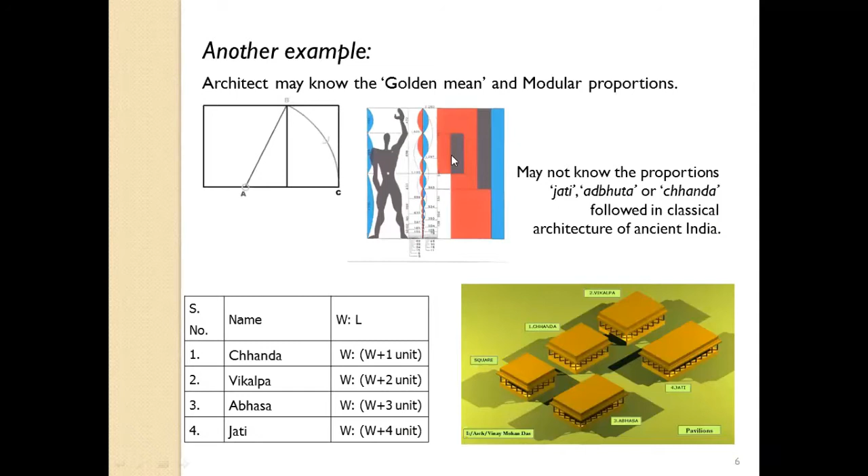Another example of proportions: Jati, Adbhuta, Sarvakarmika, these are the proportions of buildings which describe the width and height ratio, 6:9, 5:8, and so on. We are not aware of this. We are only aware of golden mean and modular proportions.

Another example, in case of town planning, we know the principles of town planning as neighborhood planning, garden cities, three magnet theory. But are we aware of the detailed plans described in our ancient Indian treatises like Dandaka, Sarvatobhadra, Nandyavarta, in which every detail related to water supply, sanitation, roadways, open spaces, built-up spaces, and even dimensions of roads are given? But the problem is that all this is not taught to us.

This is the irony, that we consider Vastu Shastra as ritualistic. The problem is those Vastu Shastris who talk about mystical things are actually pandits, not technical persons. So even if they go through the treatise, they will not be able to understand what Dandaka, Sarvatobhadra, Nandyavarta means. They only talk about the small portion which is given in the Vastu Shastra as mystic, but we don't know about the larger portion. So there is chaos.

So the objective of this is to make you aware that our ancient Indian treatises are not mystic. They are purely and purely scientific.

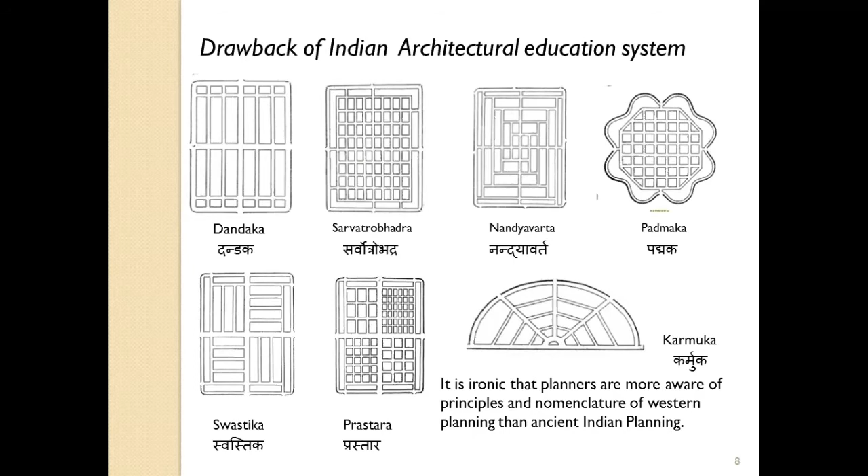Now let us come to the word Vastu, which is considered a mystery. Vastu is actually derived from a word Vasu. Vasu means matter, and Vastu is the act of modifying matter into a usable form. That's why it is called Vastu, and the treatise written on modifying matter is called Vastu Shastra.

Once we modify matter into a usable form, it can be cities, towns, house, temple, villages, furniture, vehicles, sculpture — any form we convert matter into something usable, that comes in the domain of Vastu Shastra. So it is actually the relationship between dweller and dwelling. In modern terminology, Vastu is equivalent to architecture and planning that we have studied in our 5-year degree course.

Let us take a hypothesis. If we think in context of medical sciences, let us consider Western medicine and architecture-planning, again a Western system of education. If we consider allopathy as architecture and planning, then we have to consider yoga and Ayurveda as Vastu, that is the Indian system of planning.

Now, before we go to Vastu Shastra and the details we are dealing with, let us look at the present system of designing buildings. Since you are all architects and students of architecture, you might have designed a single residence. While designing any building, we talk about aesthetics, proportions, circulation, space requirements, climate, sun movement, energy, management principles, services, construction technology, building materials, structure, joinery, and much more.

All these details are already described as we study in the present system. In ancient Indian treatises, hundreds and hundreds of verses are written on these. Even the joinery detail, the details of trusses, the details of roofs, building materials, how to make a brick, joinery including mortise joints, tenon joints, all those. Only the names are different, they are Indian names. Services, water supply, sanitation, each and every detail is there.

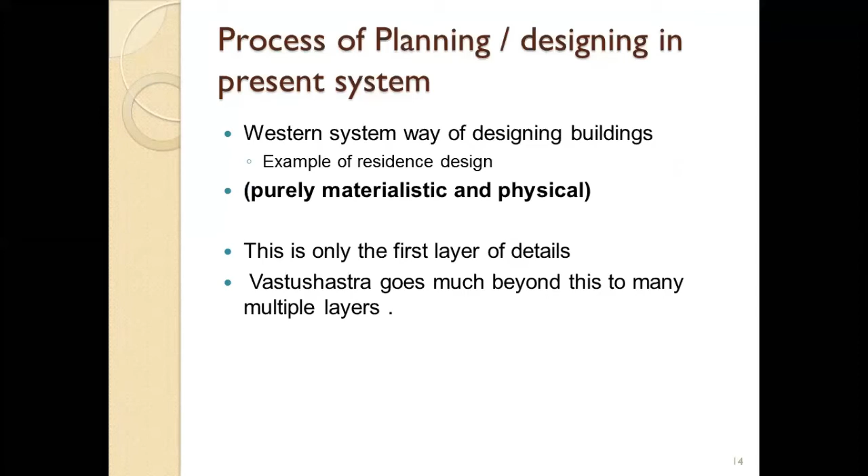Our building structures are designed based on the human body. So before we go further, let us quickly look at the human body. The human body basically consists of a physical body which has proportions, a mental body, that means your thoughts, and a spiritual body, based on your horoscope, the day on which you were born.

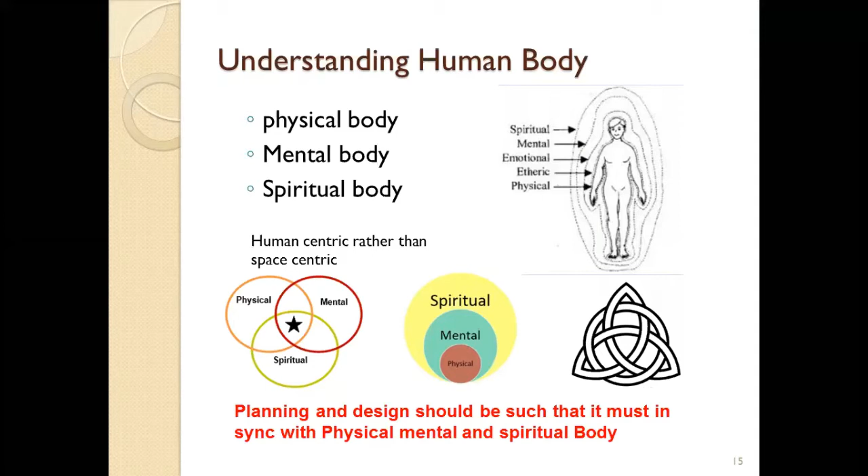So how are all these physical, mental, and spiritual bodies taken care of while designing buildings as per the ancient Indian system, apart from the first one which I have already addressed? I have conceptualized 6 layers that our ancient Indian treatises take care of while designing a building. The first is physical space planning, which I will not talk much about. You know how to design a building. All those details, all those subjects which you have studied in your 5-year B.Arch degree course, except RCC, exist in ancient Indian treatises in the same detail, maybe even more.

So I will now talk about the physical body, that is body proportions, the mental body, that is your thought process, and the spiritual body, that is based on your horoscope. Now this is somewhat ritualistic, you may believe it or not, but some persons do. Even if you remove this particular layer, although it is also very scientific, you still have to consider layer 5 and layer 6 — the geometry of your residence, the geometry of your body, and the geometry of the cosmos have to be in sync for greater resonance. The last layer considers time as a fourth dimension. The fourth dimension, after length, breadth, and height, is time.

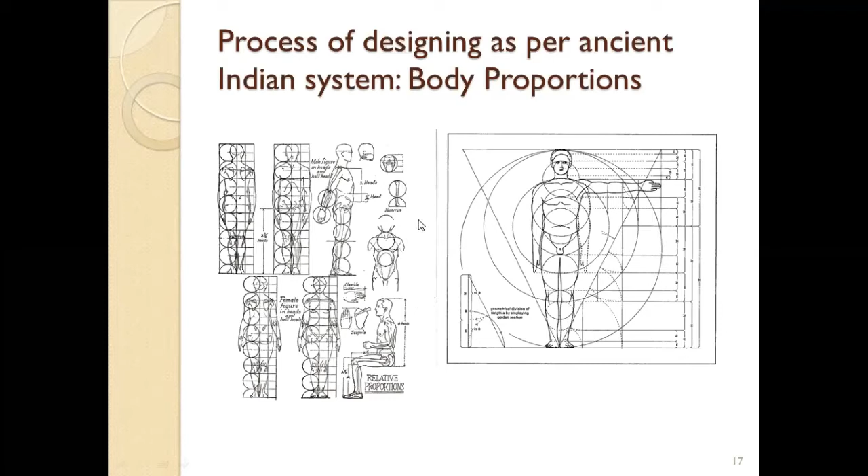Now coming to the second layer, physical body proportions. Medical sciences and other sciences have already established that our body has certain proportions, and these proportions are almost fixed. Not only our body, but our internal organs are also in certain proportions. So if we study these proportions, we will be able to find the proportions of the body — students of fine art are able to do this much better than us. These are just images I have taken from the internet, just to convince you how the proportion system works on our body.

Now, these proportions in the ancient Indian treatises are considered with reference to the dimension of the middle digit of the middle finger of the right hand, which I have shown on the right-hand side. That dimension is called the angula, and it is approximately equal to 3/4 inch. This is the basic dimension for designing any building, and it takes care of your body proportions in relation to the building proportions.

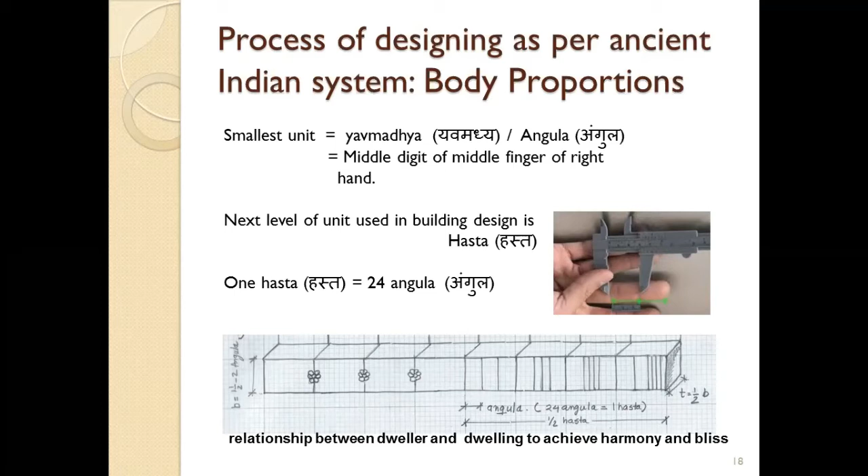Now, coming to the mental body system. Here I would like to give you certain examples — if you watch a concert on TV, and if you watch a concert live, what is the difference that you find?

Actor is same, voice is same, ambience, what you see there and what you see on the TV is same, but still we enjoy the live concert most. Think of it.

Another example. If you go to a market, will you purchase popcorn? I think no. But while watching a movie, you prefer to purchase popcorn. Why? You are ready to pay 100 rupees for a small pack of popcorn, even if you are not hungry.

So let us recall some concepts of our mental body. Our body has 5 senses - ear, skin, eye, tongue, nose. These are the sense organs. The main thing is, if all our 5 senses are pleased, I will be able to enjoy any event most, because they are happy.

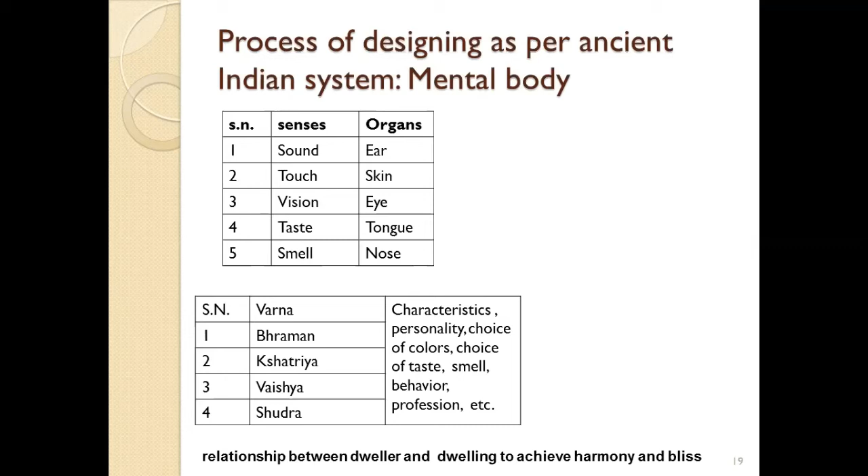I have to be fast. Now this is the third part of the ancient Indian system. You can call it little ritualistic also because I don't know whether you believe in Jyotish Vigyan or not, but I think it is established.

You know that each and every body affects each and every other body with m1 m2 upon r square. So at the time of your birth, the major planets which are near - the sun, the moon - affect most. Based on that, your horoscope is prepared. Even if you are not interested, you can ignore this particular layer of the system.

So ancient Indian architects considered the dwelling unit as a living organism. All these buildings - this is also proved in science now - matter is a living organism, it's not dead.

The ancient Indian architects performed various detailed mathematical calculations based on the nakshatra in which you were born. That means based on the location of sun and moon at the time of your birth, with respect to the various nakshatra, that means in which constellation they are, gives you the details about your personality and much more.

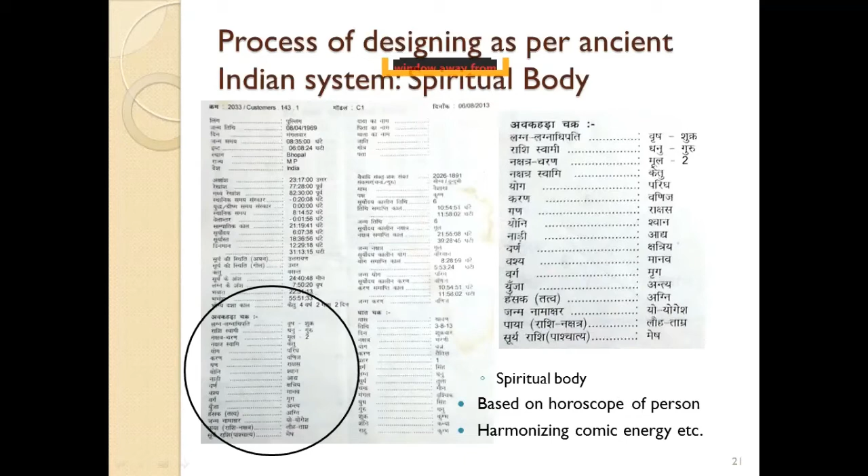So how these formulas are prepared, how mathematical they are, and how they are applied, I am just going to give you glimpses of it. This is just an example. If you take the printout of your horoscope at a particular point, you get some details like this on the right hand side. I am only interested in which particular constellation I was born, that means in which constellation the sun and moon were. Once we know that, I have to perform detailed mathematical calculations.

Do not look at the left side of it, that is Aaya, Var, Vyaya, Ansh, Dravya, Nakshatra. Just consider them A, B, C, D. Because sometimes if I talk about names, you consider them as ritualistic, so I just want to replace these names by A, B, C, D. So what is done is, I have written a word, pind. Pind is nothing but a mathematical composition of area and perimeter of your plot and your built up space.

So once you design the building, the area and perimeter, see how technical it is, are multiplied and divided in various aspects to calculate our variables A, B, C, D, E, F, G, H and so on. It requires detailed mathematical calculation. That means area multiplied by 9 divided by 8, and whatever remainder is left will be called as X. And any Pandit is not able to perform these calculations, so they don't do it.

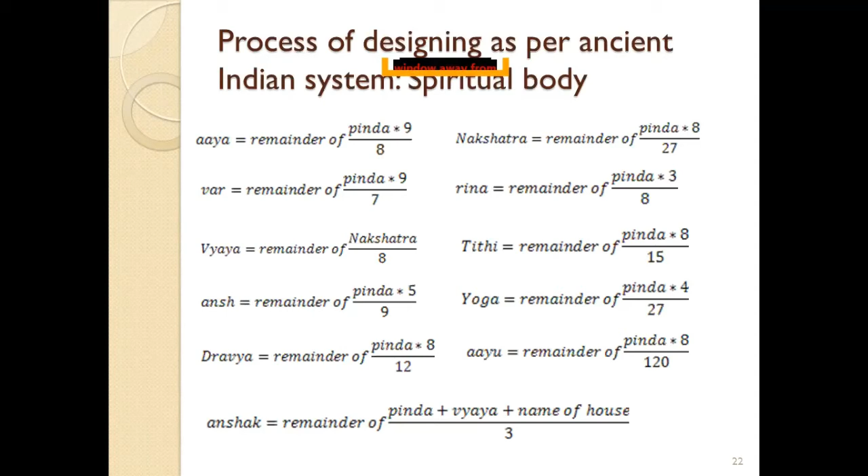They say that once all of them get matched with the constellation in which you were born, your house is in sync with your spiritual body also. So doing all these calculations and optimization is a complex process, purely mathematical and technical. So you can try it. I don't know because it is related with Jyotish, so I don't know whether you believe it or not. But I say at this particular stage, why don't we try it? There's nothing wrong in trying it.

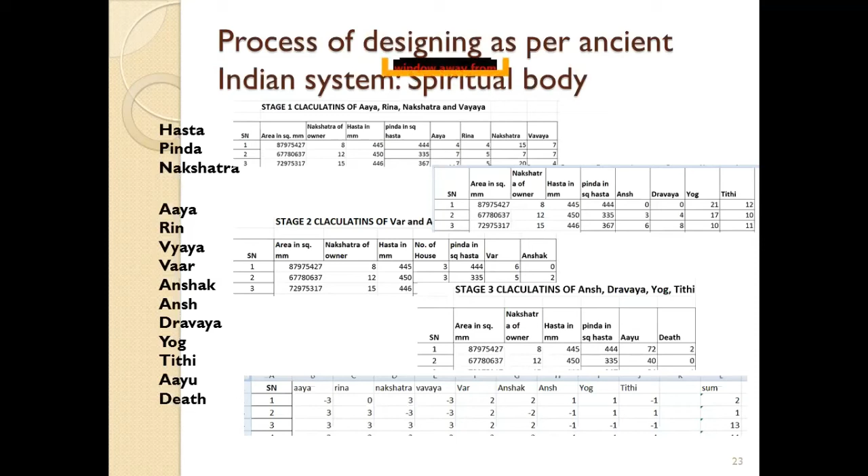So once all these are made, that means we have taken care of our physical body by proportions, we have taken care of mental body by our senses, and we have taken care of the spiritual body by considering the constellation of birth. Now let us go to the next layer, which is harmonizing mind, body, and soul with the cosmic geometry. Now what is cosmic geometry?

You might have heard of two things which are very popular in Hindi, Saur Mandal and Tara Mandal. Similarly, this is a sort of mandal. Our cosmos is very large and very complex. It is really difficult to represent the complete cosmos in the form of a picture, or to describe the cosmos in words.

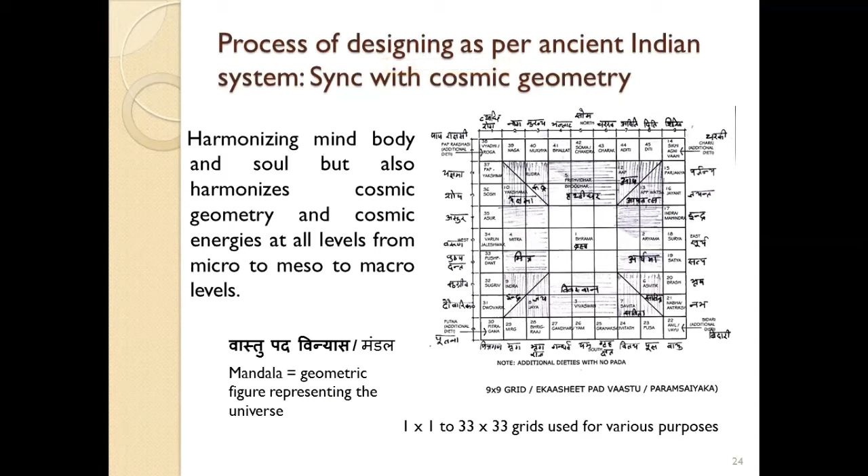So abstractions are required, whenever things are very complex we try to put it in abstract form. So this grid is an abstract of the complete cosmos, in which they have represented the complete cosmos in abstract form, and we call it a mandala. Now once we have converted the complete cosmos into an abstract form, we also say that as is the human body, so is the cosmic body. So what is done is, over this abstract form, a human body is overlapped, and then what we call Vastu Purush Mandal.

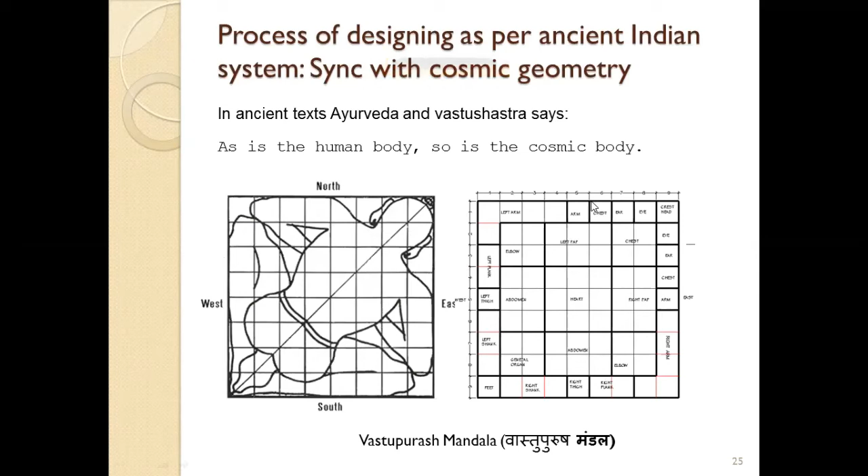Vastu Purush Mandal, the cosmic man, the cosmic whole. This Vastu Purush Mandal is made, and then this geometry is refined, and this geometry comes out like this. Now, coming to various details, as you know our human body has marmas and shiras. What are those marmas? Marmas are actually the vital points in our body. If our vital points are injured, it becomes a threat to our life.

We feel more intense pain if we hurt on these vital points. Now, these vital points and shiras are nerves and veins.

If we look at the philosophy of acupressure, acupuncture, naturopathy, naturotherapy, in which we go for massage, and which treats all the ailments of the body, it basically works on marmas and shiras. That means the vital points and nerves and veins through which the energy flows, because of which we are alive.

So all these marmas and shiras are further mapped. Considering it as a human being, all these marmas and shiras are further mapped on the same geometry, and you get the figure, something which is given on the left hand side.

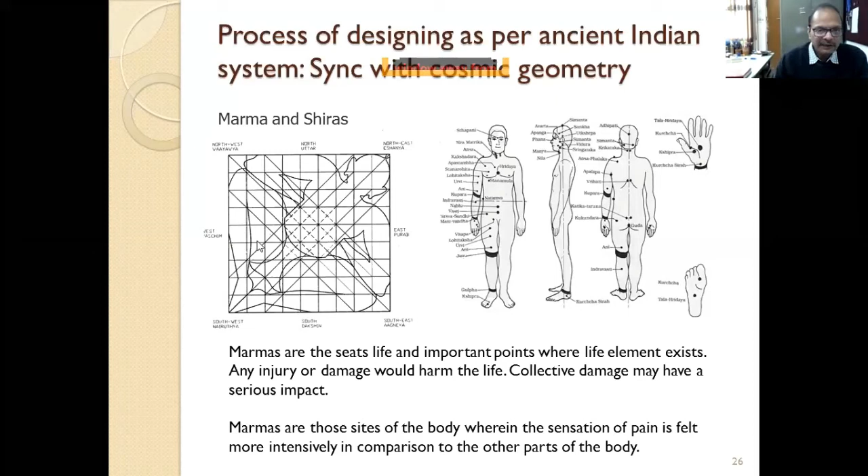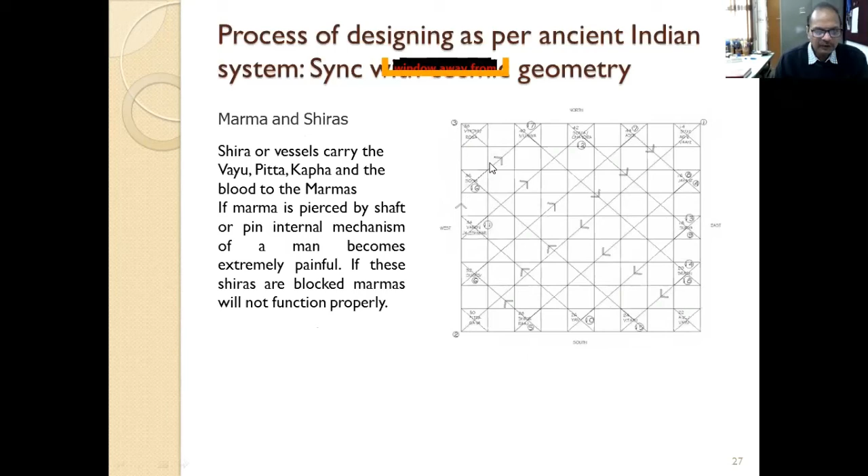Now, as there is energy flow within our body which makes us alive, all the flow of those energies based on the marmas and shiras are also mapped on. And all these shiras and the flow of energy are mapped on the cosmos. Finally, we get something like this, in which there is an overall cosmic geometry in an abstract form. There is a Vastu Purush Mandal, then there is Marmas and Shiras and the vital points, and everything is mapped.

This is a pure representation of cosmos based on the hypothesis which ancient Indian texts state: as is the human body, as is the cosmos. So this abstraction becomes the basis of designing our buildings based on ancient Indian texts.

Now, if we design these buildings based on this particular geometry, then we can say that our human body, our buildings, and the cosmos, their geometry, their proportions, their flow of energies, everything is the same. That means the way the cosmos is, the way our human body is, the same way our buildings are.

So the frequency of the cosmos, your residence, or your human body matches, and there is a resonance once the frequency matches. So there is a lot of positive vibes at that particular area. This is what is an assumption.

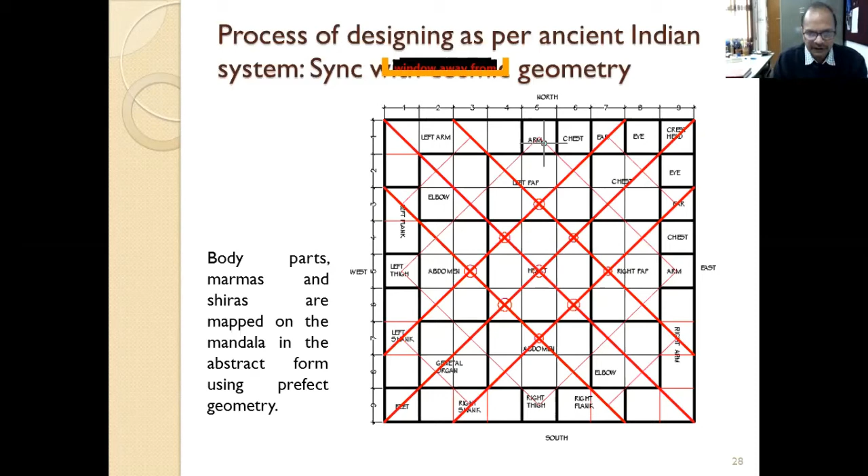And how to do it? This is just an example that based on these grids you make the plan, but I am not going to explain how it is to be done. But this is the next layer which our ancient Indian texts take care of.

So with the help of this, I had taken care of the first layer, that is purely Western, talks about proportions, aesthetics, geometry, design, spaces and all. Second layer, our body proportions by using the human scale, again very scientific. Third is mental body by using our taste, sense organs, again very scientific.

Then comes this spiritual body. I take it as scientific, but if you don't believe in it, okay, let us ignore it. But there is nothing wrong because it has a lot of mathematical and pure geometrical calculations involved. And then comes the sync with cosmos. This is again a pure, very scientific way the cosmos works, and the way our building should all be in the same geometry. This is what we have learned from it.

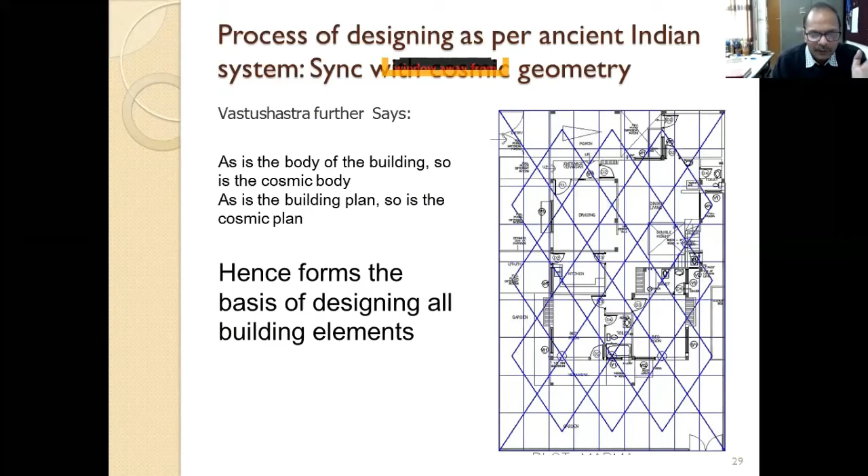Now, let us come to some of the logics of why we should believe it. So before that, let me tell you the reasons why we should not believe it: because it is old, because it is outdated technology, because it is written in Sanskrit, because it is the domain of Pandits, because it is old fashioned, because it is the knowledge of villagers. And there are so many reasons not to believe it.

But now let us also look at some of the reasons why to believe it. First, let us have some logic. Whenever we make any investigation, whether an event in court or somewhere else, whether the event has happened or not, whether it's true or not, what people are saying is correct or not, what we do is we normally call different people at different points in time and ask them the same thing. If everybody repeats the same thing, we assume that this particular event has happened.

Similarly, if we look at the ancient Indian texts written thousands of years back by different sages in different periods of time and at different locations, you find that they are all more or less the same except for some regional variations. There were no flights, there were no ways to communicate. So based on this logic, and I am not only talking about those texts related to architecture and planning, I am saying all those texts related to even medical science, even your way of living life, the various texts available in ancient India are all in perfect sync.